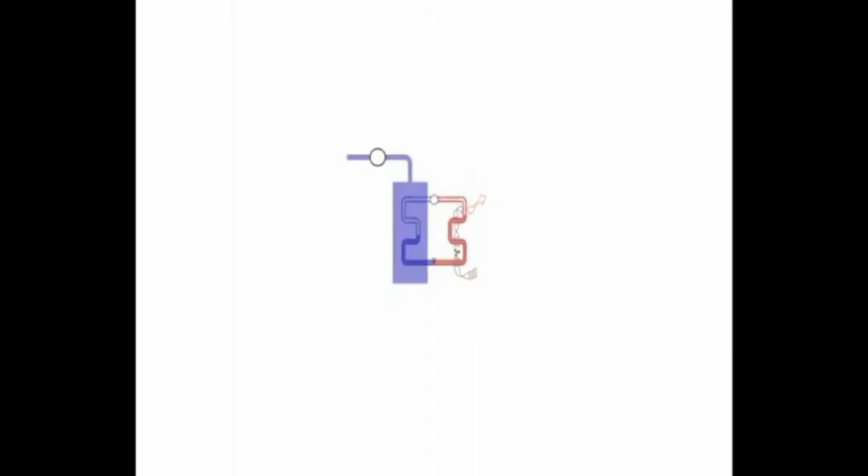Air performs reasonably at carrying cold air, but water is better at heat exchange and does a superior job keeping cold over long distances. For this reason, many buildings, and some campuses or city districts, utilize chilled water.

In this regime, pumps carry water chilled on the evaporator side, which is to say the cold side, of the compression refrigeration loop, to sometimes distant air handling units. The air handling unit then blows air across coils of chilled water.

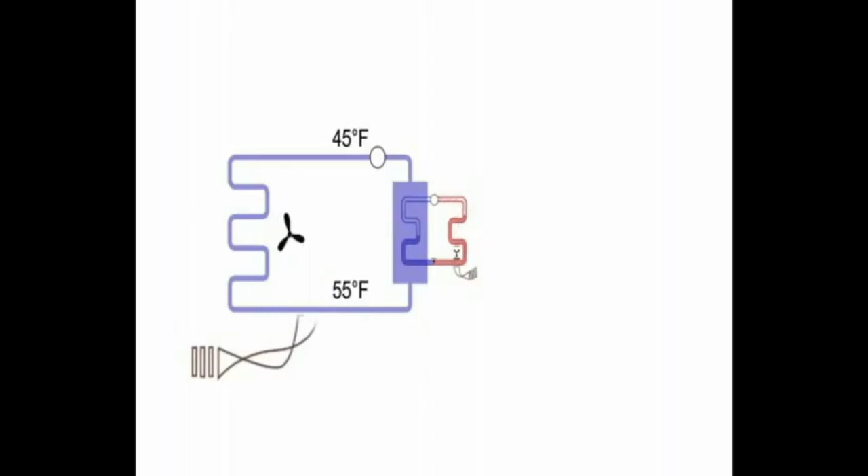Rather than coils of chilled coolant as we saw in previous examples, thereby cooling 70-degree return air to 50 degrees for distribution through ducts.

The chilled water and coolant never touch or mix. They just exchange heat. To picture this, you might imagine a closed-loop pipe of coolant moving through a barrel of water, which is part of a separate closed loop.

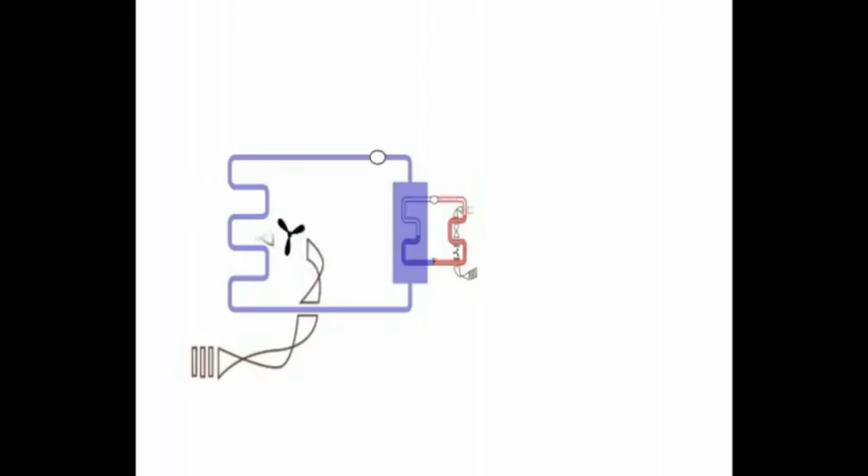Similarly, on the hot side, we might increase efficiency and capacity by removing the heat in the condensing coolant with another separate loop of water. This condenser water is pumped from the condenser to a cooling tower, and water is allowed to cascade over a series of baffles, where the water is cooled by the outside air.

When needed, an impeller fan can assist airflow across the cascading water. Some of the water evaporates and is replaced with new water, but most of it falls to a pool, where it is pumped back to the condenser.

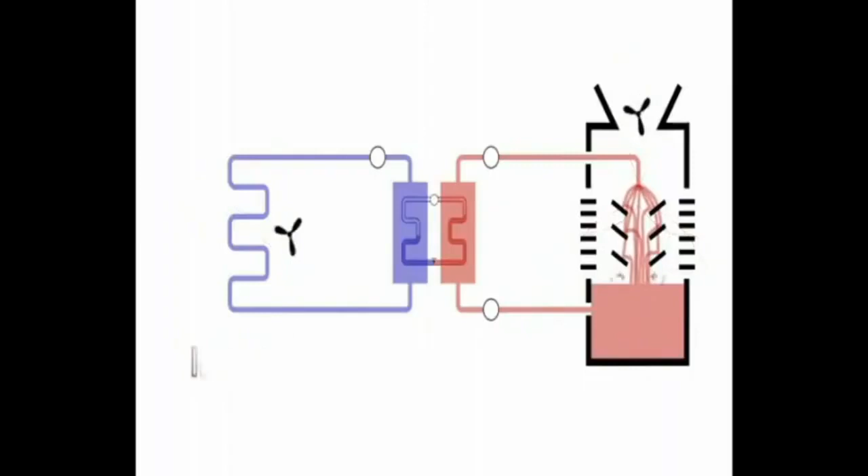This distribution network using water is complicated, but not exceptionally complex. Let's review. Water is cooled by the evaporator and distributed to the air handling units to cool room air. A separate loop of water cools the condenser and carries its heat to the outside air via a cooling tower.

You've seen cooling towers on roofs and adjacent to buildings, or as part of central chiller plants. The machine that does the compression refrigeration loop in this layout is termed a chiller.

As we've seen, the recirculated air is cooled by the chilled water coil in the air handling unit, but that's a bit of a lazy simplification. In fact, we will use the air handling unit not only as a thermal comfort device, but also an indoor air quality device.

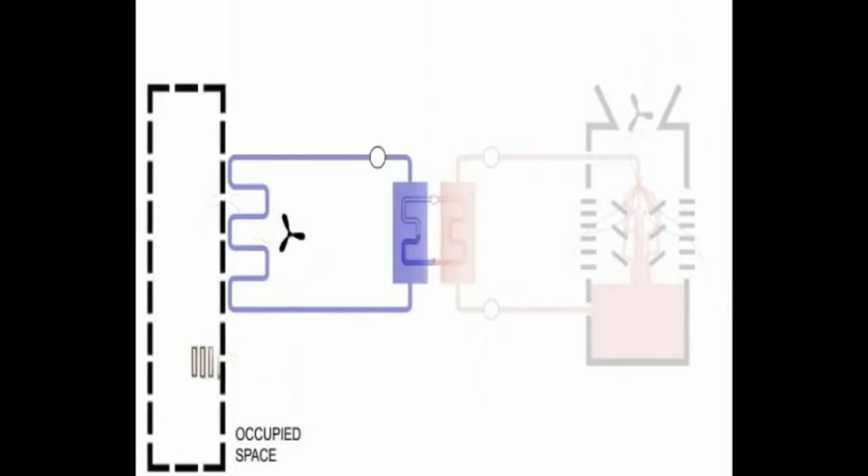Outside air is introduced into the air loop, and that outside air combines with recirculated air from the room before both volumes of air move across a filter.

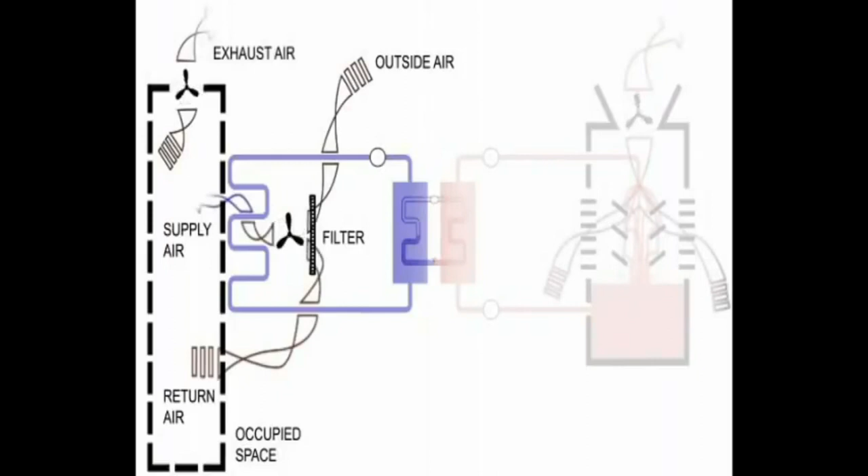Of course, simply adding lots of outside air without exhausting some of the inside air is not stable. So exhaust fans release some of the portion of the stale interior air, that portion not destined for recirculation, to the outdoors.

Exhaust fans often draw from lavatories, chemical storage rooms, machine shops, and other zones where used air is really not welcome to return to the building.

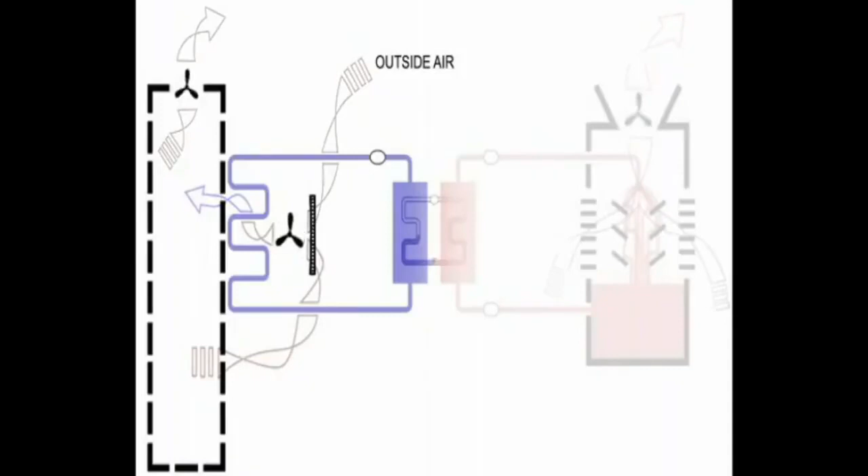Simultaneously, a whole separate volume of water looping through a rooftop cooling tower cools the condenser side, the hot side.

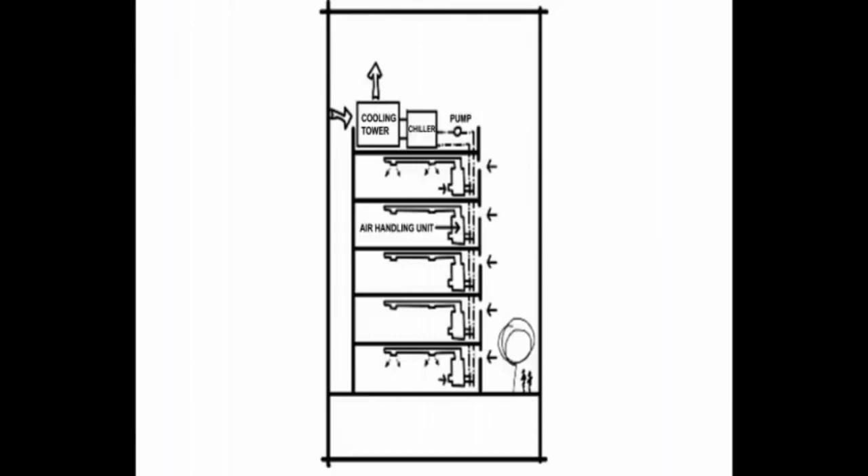Now from the building section, we return back to the diagram. This is a good time to introduce mechanical heating, which is far more intuitive. For combustion, we require the usual suspects.

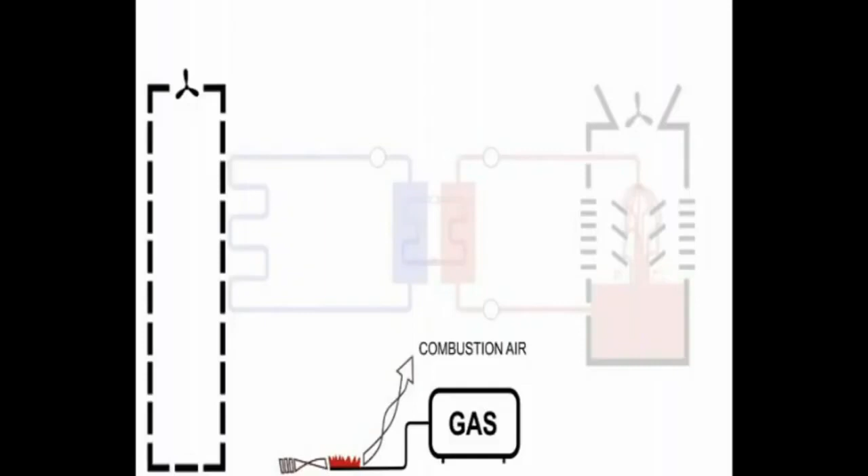The burning fuel heats water in a boiler, and that water is distributed, either as hot water or as steam, via another loop to coils in the air handling unit. In the cooling season, the chilled water loop is activated, but during the heating months, the hot water loop is activated.

The boiler may also serve radiators, which are common on the perimeter of buildings where the mean radiant temperature may otherwise be quite low relative to the indoor air temperature.

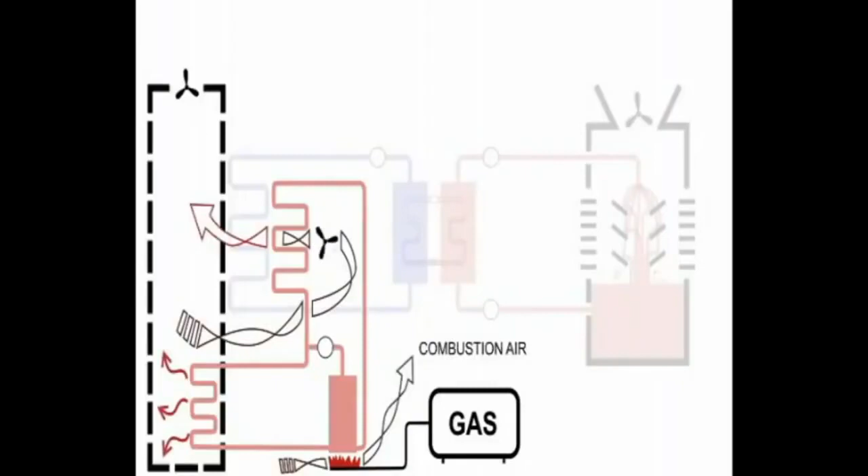Economizer cycle. Buildings, especially in the interior of large structures, often require mechanical cooling even on very cold nights. This is because the heat generated inside the building by people, lighting, and equipment will offset some of the heat losses through the building envelope.

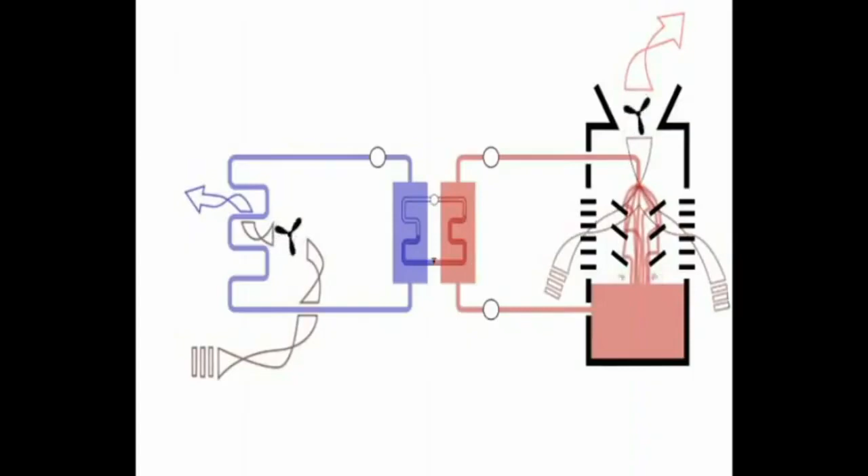In this kind of cold weather, you may be able to cool your building using the cold air outside instead of using traditional air conditioning. When you do this, when you cool your buildings using the free cold found outside instead of the compression refrigeration loop, it is said that you are using the system in a mode called the economizer. Here, we'll review two methods of doing this, so-called free cooling: water side economizers and air side economizers.

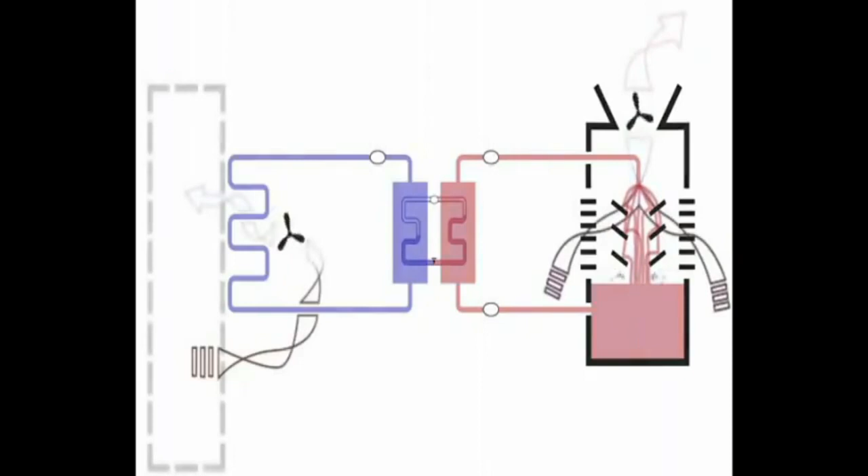In a water side economizer mode, cold air cools, and it really cools because it's winter, the water in the cooling tower. That cold water moves to the condenser side of the chiller and cools the coolant.

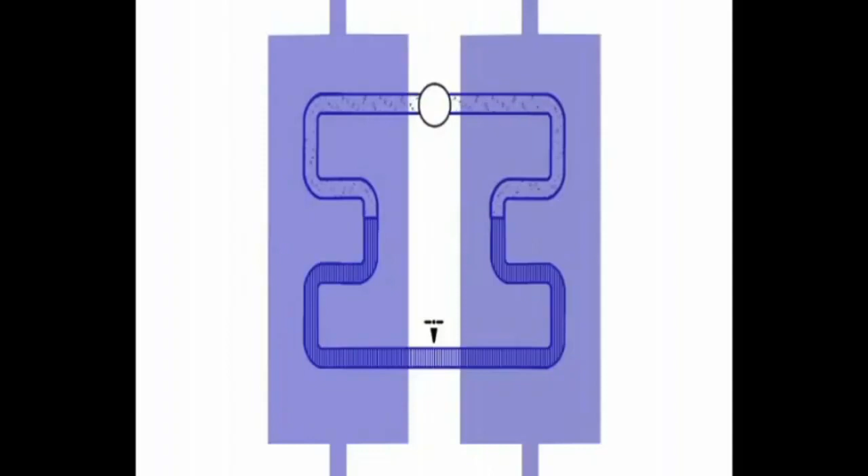The expansion valve opens, and this is important. The cooled coolant moves to the evaporator without fighting its way through the expansion valve. And there in the evaporator, it cools the chilled water. We've bypassed the compression refrigeration process entirely and still created chilled water for delivery in the standard way.

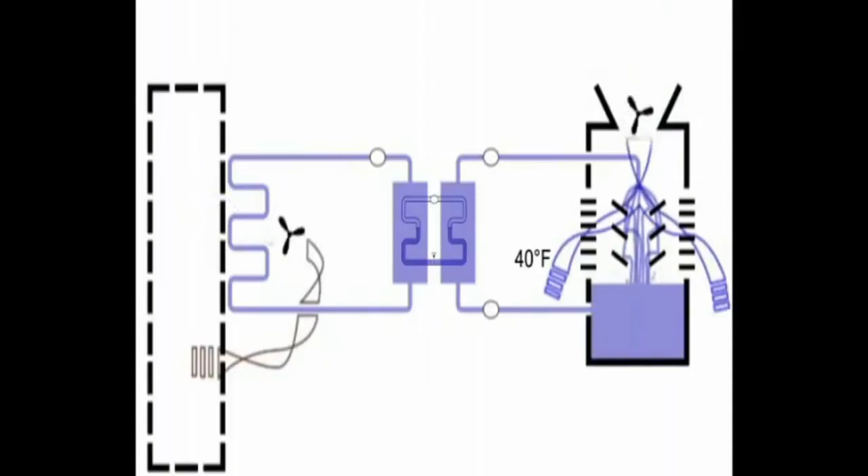This small change in the chiller, the opening of the expansion valve, actually prompts a fundamental shift in the very nature of the system. Without the expansion valve, there is no high and low pressure, no condensing or evaporating coolant, no state change, and no compression refrigeration loop. Rather, the chiller is transformed into a simple heat exchanger, an intermediary exchanging heat between the chilled water loop and the cold water coming from the wintertime cooling tower.

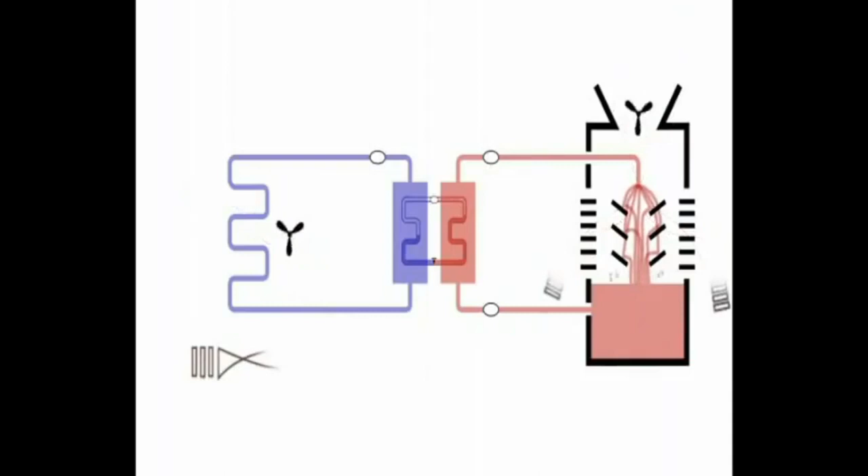Now, what you just saw is called a water side economizer because it relies on cold air to chill water. Like a water side economizer, an air side economizer uses the cold outside air to bypass traditional air conditioning in an effort to save energy. Why air condition when it's cold outside?

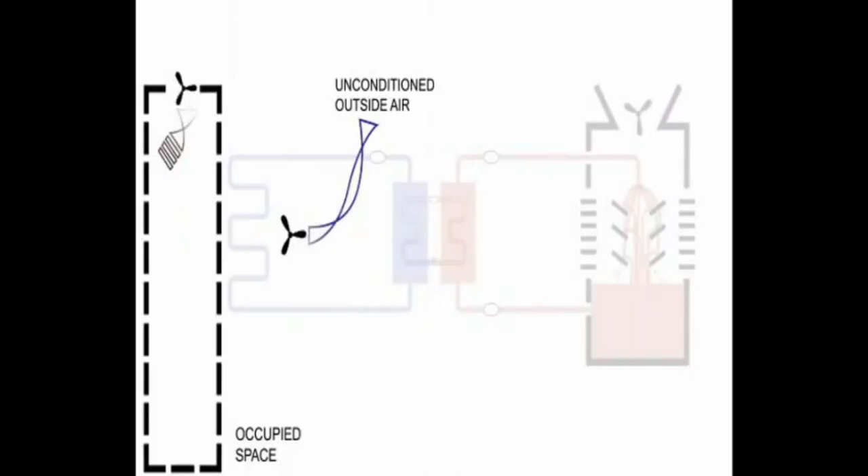In this case, in the air side economizer, it may be more energy efficient to directly introduce cold outdoor air to the inside so your equipment doesn't have to mechanically cool the warmer recirculated air. As a side benefit, this offers superior indoor air quality. All that fresh air replaces what would otherwise be mostly recirculated air.

When in the economizer mode, often called free cooling, is deployed, technicians must be mindful that it isn't too cold. Coils in the air handling unit may freeze and bust, or ice may form in the cooling tower, busting that equipment. Often an economizer cycle is not included in a mechanical package when it really should be.

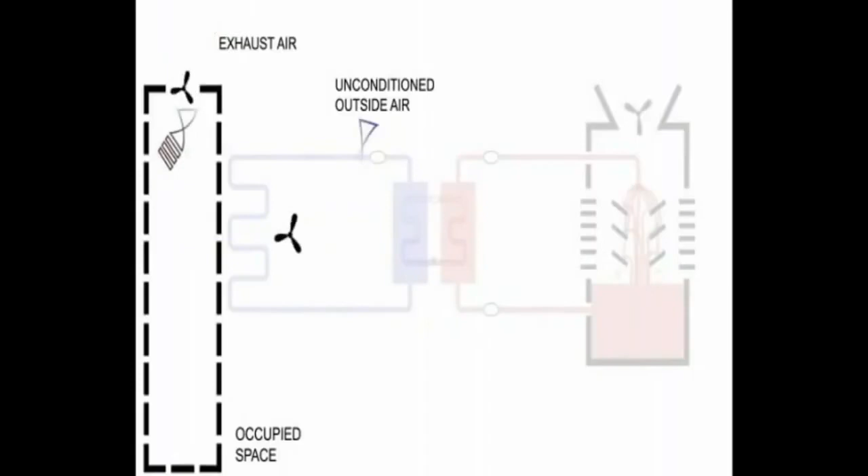It is free cooling, and even when the economizer mode is available, it is often underutilized by building equipment technicians. That's why it's vital to have the architect, the mechanical engineer, the owner, and the building technician at the table together at the beginning of the design process to get everyone nodding their heads in agreement toward a common goal.